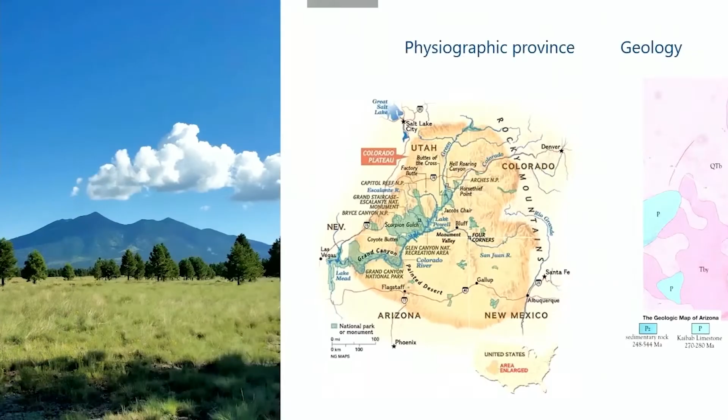And we're also at the edge of the San Francisco volcanic field. Within that volcanic field is the highest mountain in Arizona. You can see it on this picture. Mount Humphreys is a little over 12,000 feet elevation. Just to show you a map of that physiographic province, Colorado Plateau, that's on the left. And then on the right, we have a general geologic map for Flagstaff.

So the purplish colors tend to be relatively recent igneous rock, a mix of cinder, basalt, dacite, a little bit of andesite. Tends to be rather fractured, highly permeable rock. The more turquoise blue color is Kaibab Formation, which is mostly a limestone, also highly fractured and also has quite a bit of dissolution features, so it's a karst topography.

What does that mean for us as a stormwater division or within water services? What it means is that typically our streams and washes around Flagstaff are dry. They're ephemeral washes. And that's because of the high soil infiltration rate through the area due to the geology, the climate, and then also the vegetation. The ponderosa pine has a high degree of detritus and duff that soaks up rainfall.

So this graph we're showing here are two regional curves for bankfull cross-sectional area compared to watershed area. This is a typical way of looking at channel function using a traditional Rosgen method. So the red is an Arizona regional curve, the blue is a New Mexico regional curve. The dots that you see here are locations near or within the city in natural areas, and you can see they're lower than the two curves.

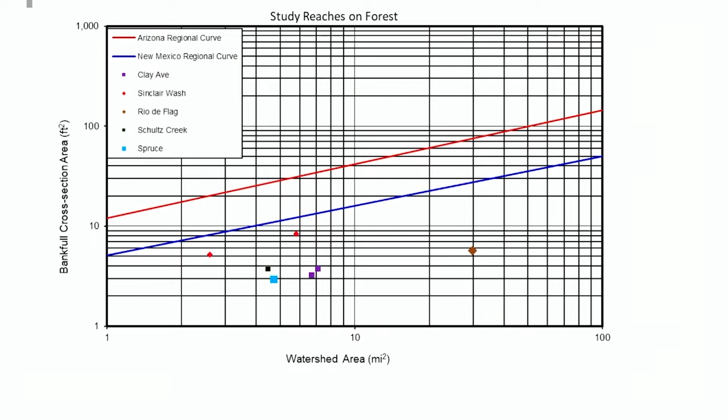So what that means is in natural parts of the Flagstaff area, the channels are undersized. And the reason they're undersized is because there's not much runoff due to that high infiltration rate. So I think I described this already. Our watersheds are historically complacent. That's to say that when it rains or snows, most of that does not come through as runoff. Most of it infiltrates or evaporates.

Now what this means is when we have disturbances in the watershed, which might be a wildfire or it could be urbanization, this drastically changes the watershed character as well as the stream behavior. So we start seeing that more flashy behavior that you'd expect with urbanization or a fire. Now this means that we have to manage for both complacent conditions coming off of natural areas that are undisturbed, and also for violent watershed conditions. And sometimes these are in the same areas. So you have one sub-watershed that has a very flashy nature, and right next to it another sub-watershed that might be completely complacent.

So when we manage this, we have a rather small team here at the City of Flagstaff. It tends to be 5 people. At the moment, we're down a few. You can kind of see the overview of the different things that we do. Within stormwater, the stormwater in Flagstaff actually is a utility, so we get a utility rate.

And with that, we oversee a capital improvement program, upsizing channels, culverts, detention basins, retention basins, low impact development, etc. We also have a fairly comprehensive system. You can kind of see some of our assets on the upper right-hand side there. And we oversee that for efficiency, maintenance, cleaning, also putting in master planning and flow modeling, so hydraulics and hydrology modeling.

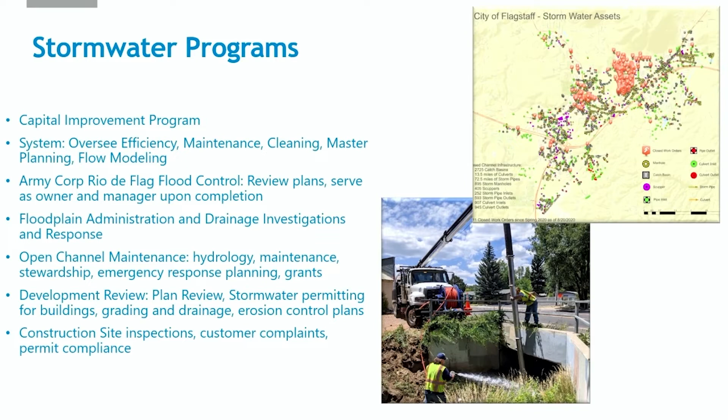So what we're talking about today is our open channel maintenance program. Historically, this has not been tracked by Stormwater until 2020. This has been tracked by our Public Works Department, a different division, and it's been transferred over to Stormwater directly in the last year. And this allows us to actually do a little QA/QC on our GIS layers and our asset management to make sure that we actually are tracking maintenance in a way that makes sense.

So we have 24 miles of channels that we report to FEMA as part of our community rating system. So that is the CRS Activity 540. And then we have another 112 miles of natural channels, minor ditches, swales that are not reported to FEMA and are just maintained within the city internally.

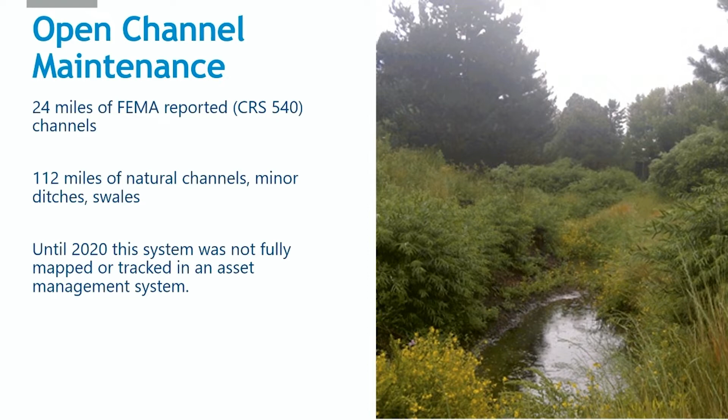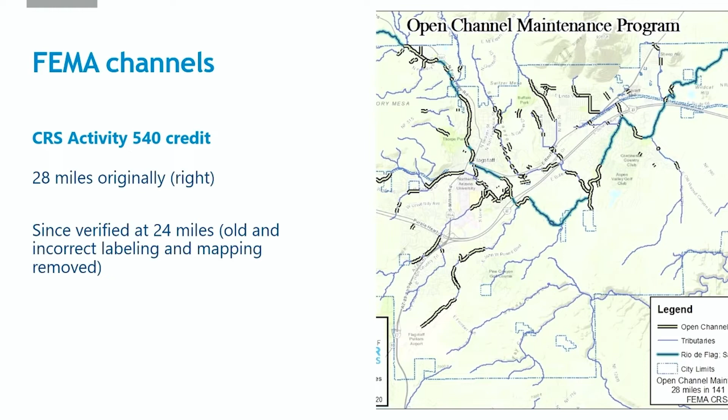So on the right-hand side, you can see a picture of those 24 miles. Before 2020, we counted it as 28 miles. Some of that was redundant or incorrectly labeled, so we reduced that through field verification. And then on the right-hand side here, you can see the other 112 miles of channels, roughly. This is being verified currently as we speak.

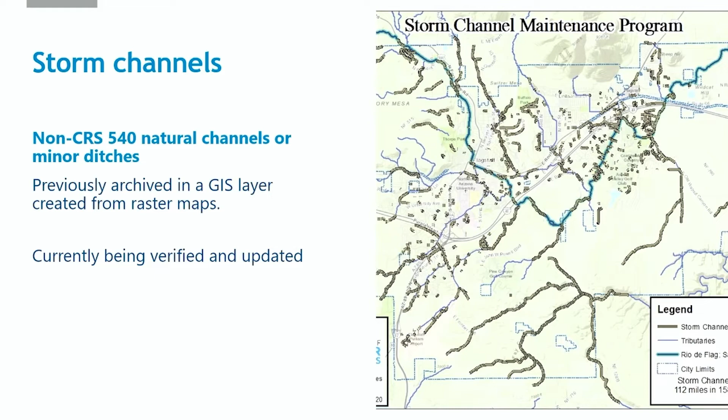All right, so here we have some examples of what we're talking about with this open channel maintenance. So up until 2020, when we took over the program, most of these maintenance activities were monitored in Microsoft Excel. So they're in a spreadsheet and they just kind of tracked it as they went. So these are the examples of how we've swapped over to our CMMS.

So for this example, you can see on the right, an example of a head cut restoration. So this is a head cut, which is where you have an active stream incision. So a disturbance, the stream starts incising, and that incision process starts moving upstream, so opposite of flow. So we're actually seeing this in process.

And here you can see where we widen this out and start laying back the banks to provide for a stable channel configuration. So this is the start of what we call a Zuni bowl, which is a type of head cut mitigation, if you will, provided by using these quasi-traditional methods in the Southwest. Works pretty well in ephemeral areas. So we're laying back the banks here.

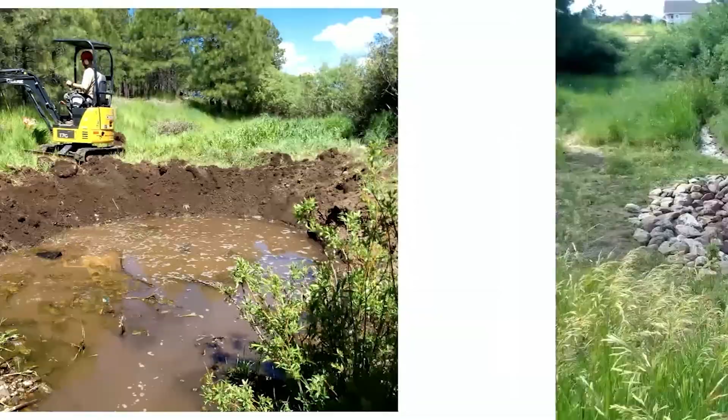Next example here is where we actually re-armor the banks, allowing for water to come in, kind of collect in 2 subbasins before leaving out through 2 check dams. Another example of a typical open channel maintenance procedure.

And moving on, I'm going to hand the presentation over to Corinne, and she is going to start talking about the meat and bones of what we're doing here with the CMMS system, our asset management here at the city.

Thanks, Ed. So my name is Corinne, and I am the Information Systems Administrator for City of Flagstaff Water Services. So I work with the SCADA and IS team. So I work with the GIS, CMMS asset management, as well as IIoT field devices. So our division or section is unique because we have our own GIS section, whereas we have a GIS for the entire city hall that includes anything but water services. So like our community development, parks and recreation, sustainability, etc.

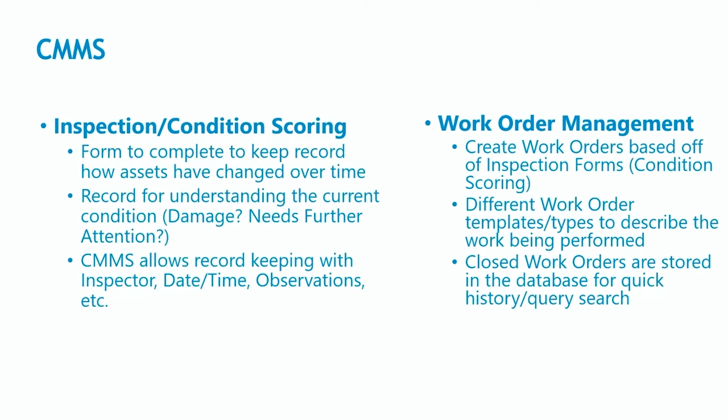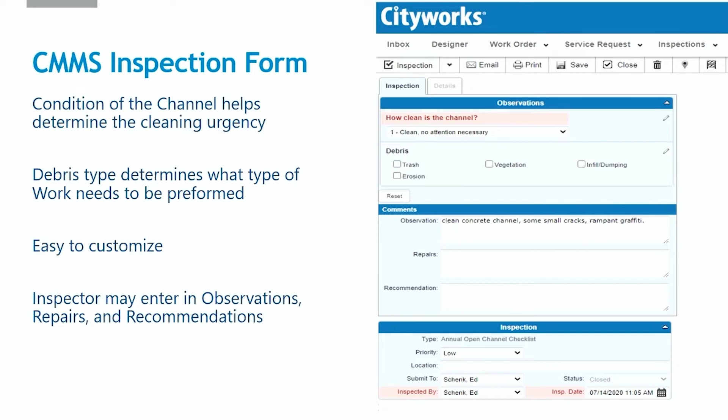Our field technicians use Microsoft Surfaces. They have the option to use that as a tablet or a laptop, and with CityWorks it's all web browser based. So they're just using Firefox, and then they need to have internet connectivity such as a MiFi or a Cradlepoint within the service truck.

And they have access to the digital atlas, so pretty much our entire GIS, in addition to all the open inspections and work orders. And for workflow, all they have to do is click on the appropriate icon, and then they can fill out the appropriate inspection form or work order form.

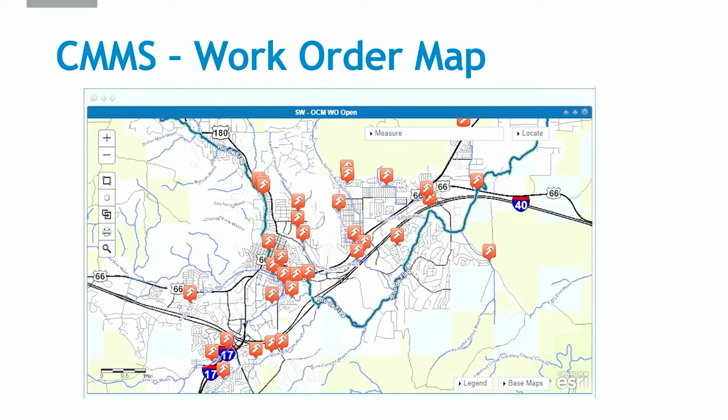This is an example of an open inbox map. So this is what the field technician can see. Here we have open work orders. So all they have to do is click on the red icon, and that'll generate the open work order inspection where they can then fill that out in the field.

So if you recall, we collect the inspections first to understand the condition of the asset, and then from there we create a work order on top of that inspection form.

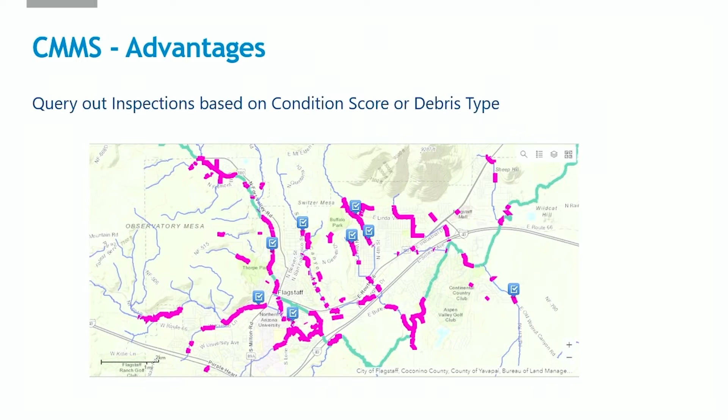So with CMMS, another advantage here is that you can query out inspections based on condition score or debris type. And so in this example on the map, you can see all of the inspections that have a condition score of 3, and those are represented by blue checkboxes. With CMMS, you can also select a specific stream reach, and you can look at that related work history in a tabular format where you can bring that down into an Excel spreadsheet.

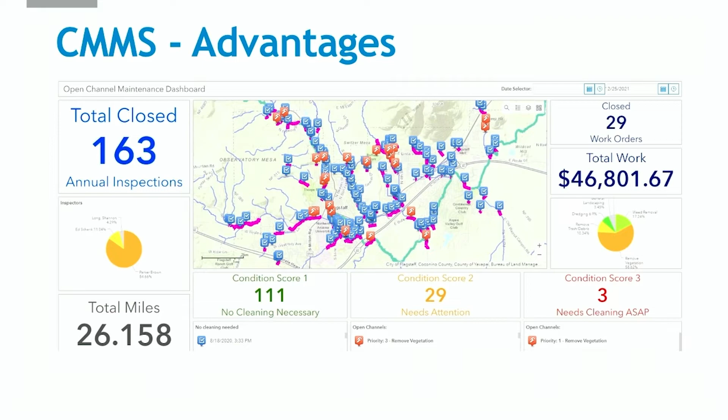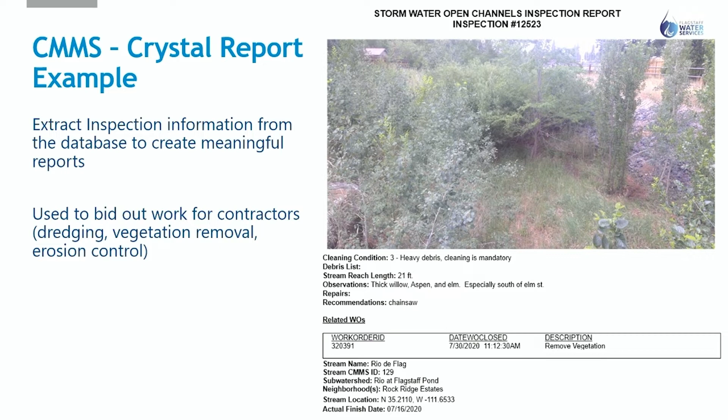And also, you can take that data in that CMMS database and use Crystal Reports to help generate these PDF static reports based on the inspection form. So pretty much, we're taking that inspection form and that GIS information, and we're creating this static PDF that we can keep in a shared drive or print out and put in a nice binder just for our record keeping.

So in conclusion, last year we implemented CityWorks for our Open Channel Maintenance program, and we were able to record our inspections and work orders through a digital software, and this allows us to record the history for that Open Channel maintenance. And with CMMS, we can document the type of work, the conditions, and cost, and then we can display that information on dashboards where we can easily distribute that to the individuals who want to see this information.

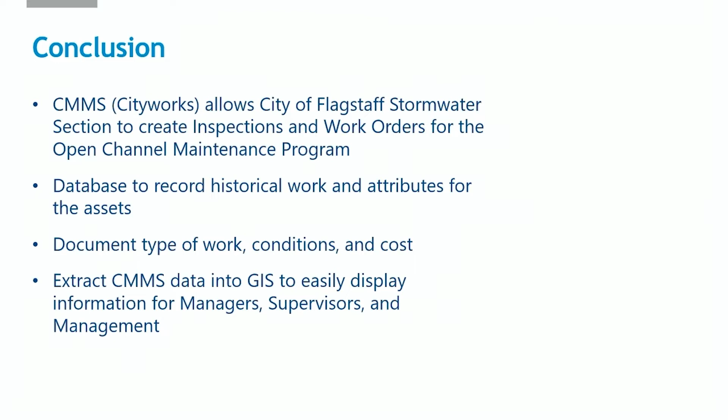So the first question for Ed and Corin is: are Flagstaff's stormwater and floodplain management programs integrated? Do they handle all FEMA, EPA, and Corps of Engineers coordination? Yeah, so I don't want to say we're unique, but we're different than most municipalities in Arizona where we are coordinated and integrated. So we are a stormwater utility. We receive a utility rate from the community.

So we do manage the FEMA floodplain within the city limits. So we have to work with the county on the city-county coordination where we have water either entering the county or entering the city. Stormwater water quality we work on ourselves, and then obviously the Army Corps, the 404, 401 type permitting we do as well. We also have our own capital improvement program, CIP program. So we have about $2 to $3 million a year for improvements.

Nice. This one's probably more for Corinne: how were the open channels segmented to track work against them? For example, were they segmented by specific lengths, between access points, road crossings, etc.?

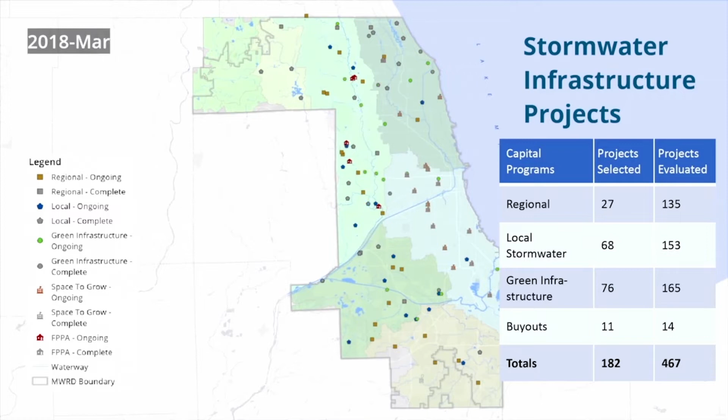As our stormwater programs have expanded, combining all the prioritization factors in an ever-growing data set has become a challenge. Fortunately, we have some very smart engineers like Eddie Paulino who are helping us to make more informed decisions on the projects we add to our capital improvement program. Eddie? Thank you, Joe.

Before I get into the example, I would like to show you what the process of decision modeling involves. What we're trying to do is create a mathematical representation of reality. We start by finding a problem we're trying to solve, then formulating it by gathering the relevant and available parameters, making assumptions, placing in constraints, and adding the mathematical relationships. From there, we perform our analysis.

In the case of project selection, we will be optimizing the linear program to maximize the total benefit our organization produces with the project selected. We then interpret our results, perform sensitivity analysis to see the impact of changing constants, and finally, we can incorporate risk by adding uncertainty into our problem parameters. We then interpret the results and see how well it matches reality. If it does not make any sense, we start over again in this iterative process.

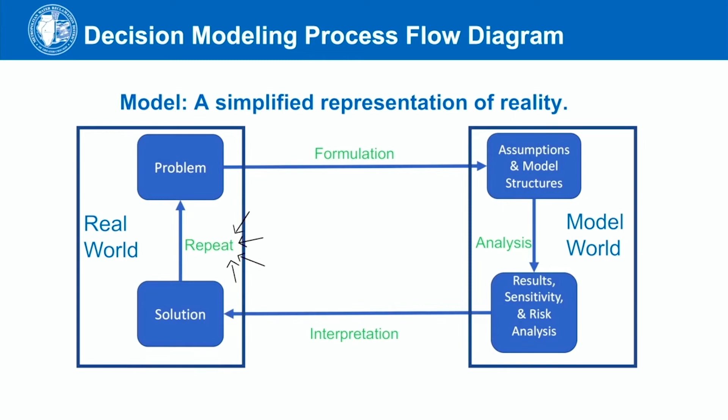Okay, so now let's get into our example. When working with these spreadsheet models, it's useful to use a color key to identify important cells in your formulation. In blue, we have our decision variables, or what we're changing. For example, we're changing, in this case, the funding contribution our organization is providing across 4 stormwater management projects.

In yellow, we have cells that are used in the formulation, which can include constants and multipliers like a discount rate, used to calculate life cycle costs, or multipliers used to assign a point structure to parameters like the number of benefiting structures or the median household income of the project community.

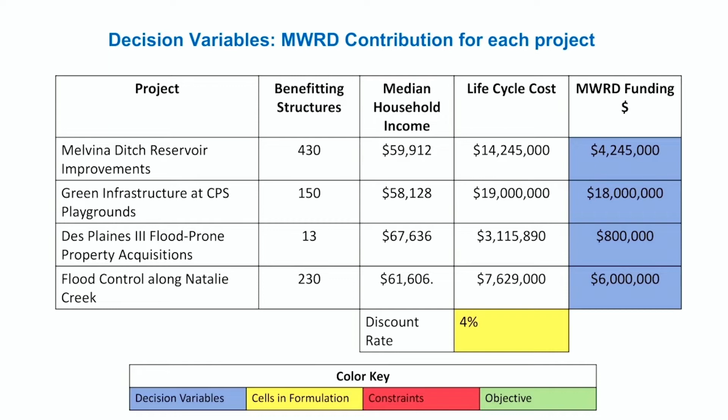In green, we have our objective function. In this example, we're using 2 selection criteria. Life cycle cost divided by the number of benefiting structures or structures being removed from the floodplain, which is scored from 0 to 10. The median household income of the project's community, which is scored from 0 to 5.

We add up the score for the 2 criteria and multiply the total to get a project score. We then sum the scores across all our projects. This formulation makes it so that the benefit of the capital program increases the more we fund higher score projects.

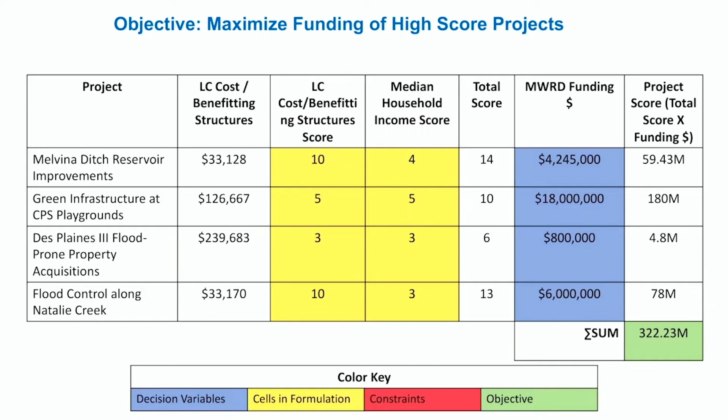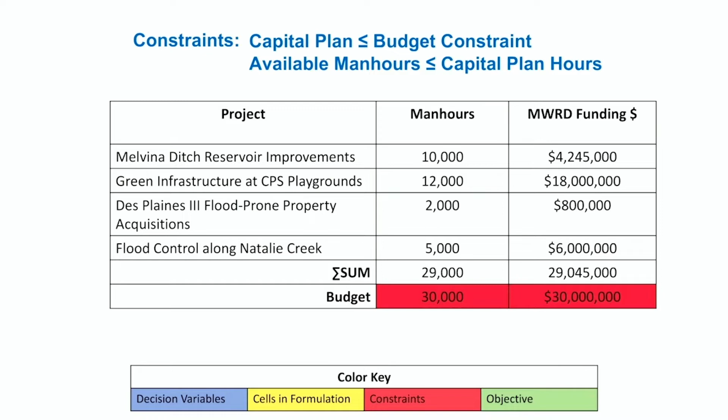In red, we have our constraints where we are making sure that we do not exceed the number of available staff man-hours to manage the projects, as well as the budget allocated to our stormwater partnership programs. The next step in this process is to enter our formulation into our tool, Microsoft Excel Solver. Solver is a standard Excel add-in that was developed by Frontline Systems. It comes with your Excel installation free.

It can be turned on by going to the add-in settings, then clicking on the checkbox to enable the feature, which you see on the screen here. The tool then shows up on your data ribbon in Excel, titled Solver. This tool allows us to maximize, minimize, or force our objective to reach a specified value. We can use inequalities to enter in our constraint relationships.

We also use the most common constraint, which is the decision variables can't be negative, which prevents us from borrowing from a low score project to fund a higher score project. The optimization method we are using is called the simplex method for our linear program.

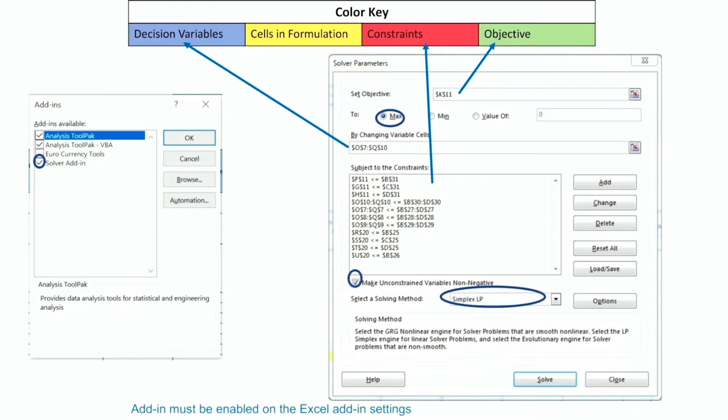The simplex method to solve a linear program can only be used when your objective and constraints are linear functions of the decision variables. It works by checking the impact on the objective when making small changes in each variable. It then exhausts each variable in order of impact until all constraints are met.

Linear models guarantee that the solution is a globally optimal solution, or in other words, the best possible solution in our problem. Solver also provides reports for linear models that do some of the sensitivity analysis you would have otherwise had to do yourself.

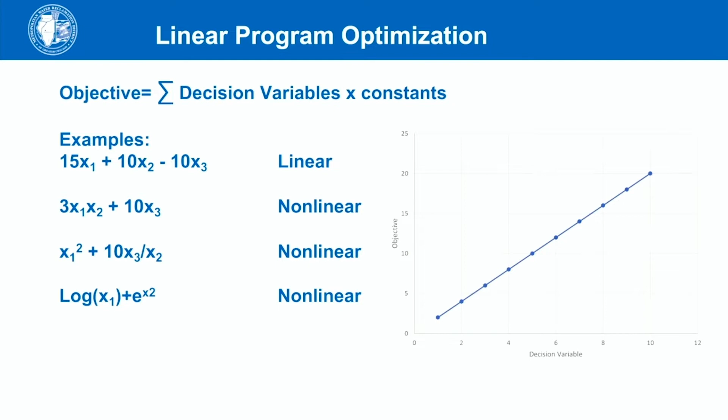The most insightful report is the sensitivity report, which gives you what it calls a shadow price, or the amount your objective changes as you shift one unit of a constraint one way or another for an allowable range. A sensitivity report can tell you, for example, that by increasing your budget or your staffing levels, you are able to fund an additional amount towards a project or an additional project in your program.

Another tool for sensitivity analysis, and this one developed by professors at Indiana University, is data table. You're able to run the optimization by changing one or two parameters at a time. Here, I am changing the weight of the median household income score and the weight of the life cycle cost divided by the benefiting structure score. That's my two criteria that I'm considering for this project selection example. This tool essentially allows you to test the impact of your assumptions by changing the assumptions and seeing how the results change.

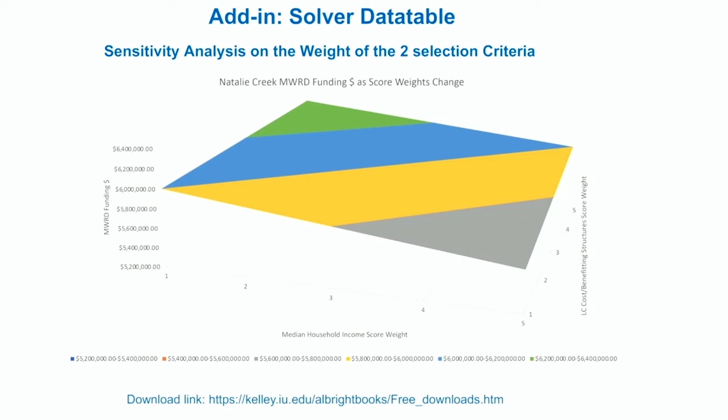Now, if you are unable to formulate your problem through a linear program, Solver also has two nonlinear solving methods: the generalized reduced gradient GRG nonlinear and the evolutionary method. The downsides of using these methods is that your solutions are local, or basically not guaranteed to be globally optimal, and it can take much longer for the computer to run the solving algorithms.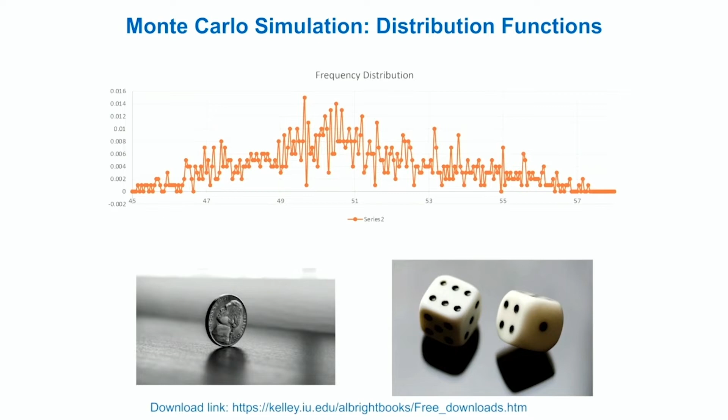The analysis essentially works by rolling a weighted dice one time for each simulation for each probabilistic parameter. We then would run thousands of simulations and see how the results change. What you would expect to learn from performing the Monte Carlo analysis on an example like this is that a lower score project may be a better option to fund on a given year if it has a higher likelihood of moving forward than a higher score project. The results of a Monte Carlo simulation analysis can provide to you confidence intervals that tell you, for example, that there is a 90% chance that you'll be able to utilize X number of dollars on a given budget year with the projects you are considering in the stormwater management partnership programs.

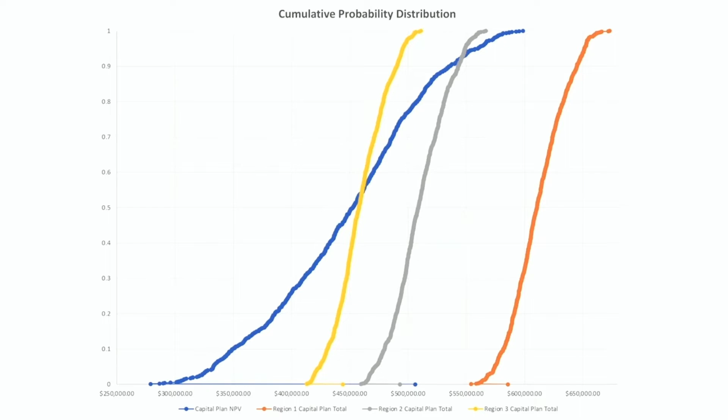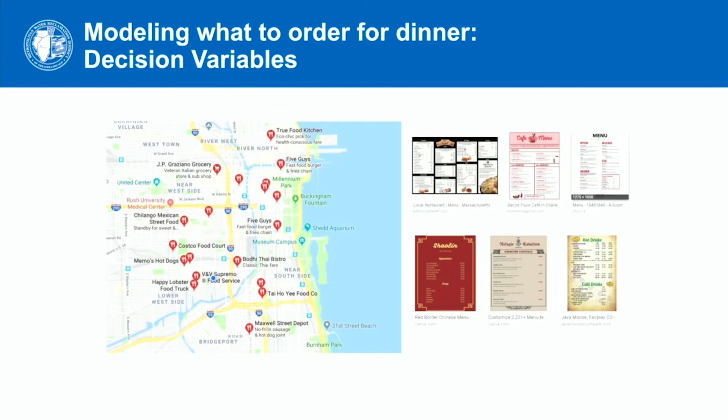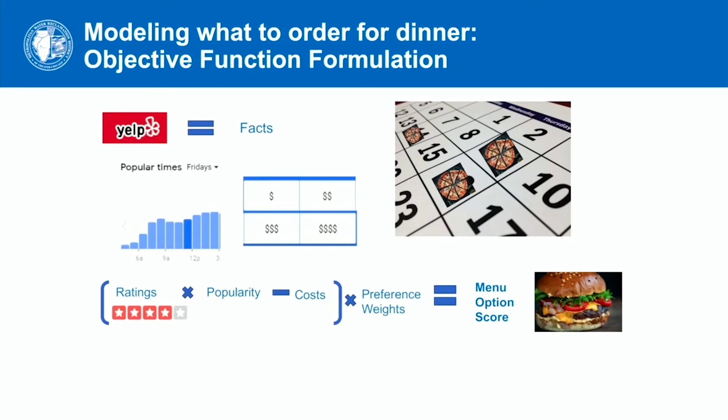All right, so we know practice makes perfect, so let's go through one short example. The problem here is what to order for dinner. The decision variables are restaurants near my house, and my constraints are going to be my budget and the distance that restaurants are able to deliver. For my objective, I'll be maximizing the score that will be given to each menu option by considering the cost, my personal preference based on what I've been eating throughout the week, the popularity of the restaurant, and customer review ratings on Yelp and Google. I'll then run my solver and check my results.

Oops, it looks like I forgot to incorporate some of the health parameters into this decision model. This example illustrates the commonly used phrase you guys have probably heard with everything going on with COVID and COVID modeling, which is that all models are wrong, but some are useful. And you make these models useful by going through this iterative learning process. In this case, I could have added some constraints limiting my daily intake of certain nutritional components based on FDA recommendations.

Okay, so we have discussed how decision modeling tools can be used for project selection, but there are many other decisions that these tools can be used for, including workforce scheduling to determine whether overtime or hiring new staff is optimal. You can use it for budget and revenue management to maintain a consistent cash flow with the initiatives undertaken. You can also use it in materials procurement to optimize if buying and storing materials now is more cost effective than buying materials when they are needed. And you can even use them for personal decisions like home purchases or even equity investments.

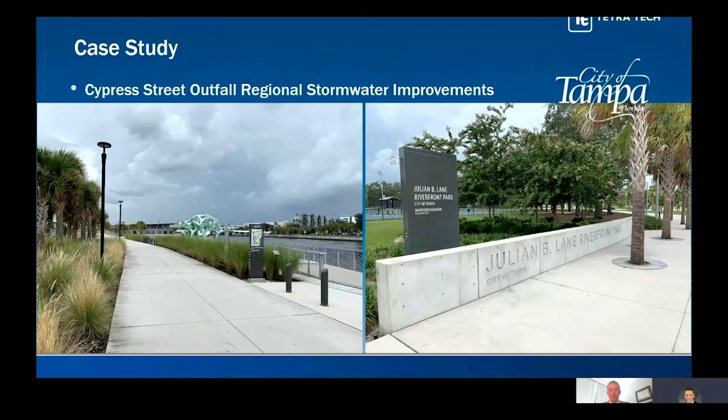Today, I'll be presenting a successful flood mitigation case study by highlighting the City of Tampa's Cypress Street Outfall Regional Stormwater Improvements Project and how we are nearing the successful implementation of providing large-scale flooding relief to this urban environment. Here, you'll see a brief clip depicting the project's location. Our project is located within the West Riverfront, North Hyde Park, and West Tampa neighborhoods, and is adjacent to Tampa Prep School, Julian B. Lane Park, and the University of Tampa.

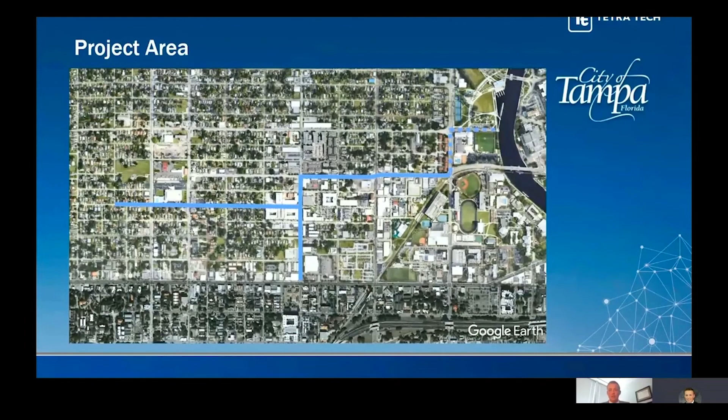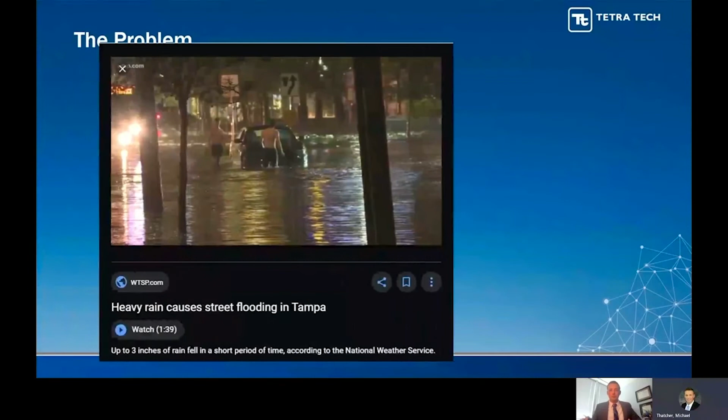So first, I'd like to start off with the problem. As depicted in these photos and articles on your screen, the city is no stranger to intense storm events. Intense rainfall in a highly developed urban environment can be a predominant cause of major roadway and property flooding, where a lack of adequate stormwater infrastructure can only exacerbate the issue. Heavy rainfall causes high-velocity overland flow, which can result in stormwater facilities exceeding their capacity. The city has been plagued with large-scale flooding due to heightened rainfall intensity, sea level rise, and a lack of critical infrastructure.

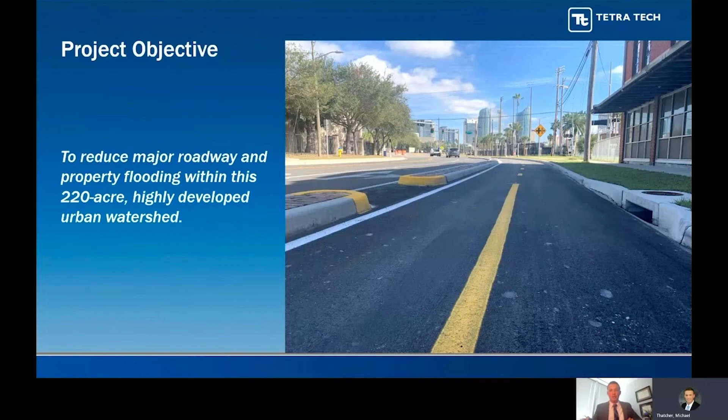Our project objective is simple: to reduce major roadway and property flooding within this 220-acre, highly developed urban watershed. So the first step for this project was setting our project's limits. The limits were determined based on previous studies and conceptual modeling efforts, records of historic flooding, including repetitive loss properties.

On your screen, you'll see the red outline depicting these limits, which are bound to the west by West Gray Street from Tampania Avenue east to North Rome Avenue, north from North Rome Avenue at Kennedy Boulevard to Cass Street, and from West Cass Street east to where we tie into existing infrastructure at the intersection of North Boulevard. In total, these limits encompass approximately 1.5 miles.

The existing infrastructure we tie into are twin 9-foot by 7-foot box culverts, which travel along North Boulevard and discharge near Julian B. Lane Park. Once we had set our project limits, a team of skilled land surveyors obtained all necessary topographic and subsurface information for use in the modeling and design of this project.

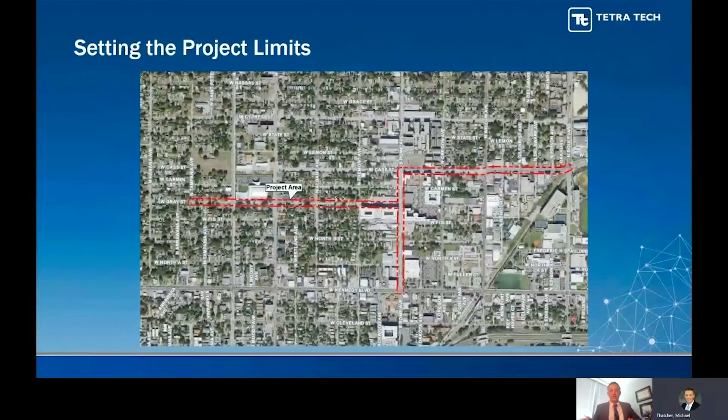For this project, we utilized XPSWMM for the stormwater H&H modeling, a product developed by Innovyze. We utilized a 2D model, which means rather than just looking at the routing of links and nodes within the project area, think links and nodes as pipes and structures, we also look at the surface aspect and how water travels relative to the ground topography. Below is an example of a link and node schematic.

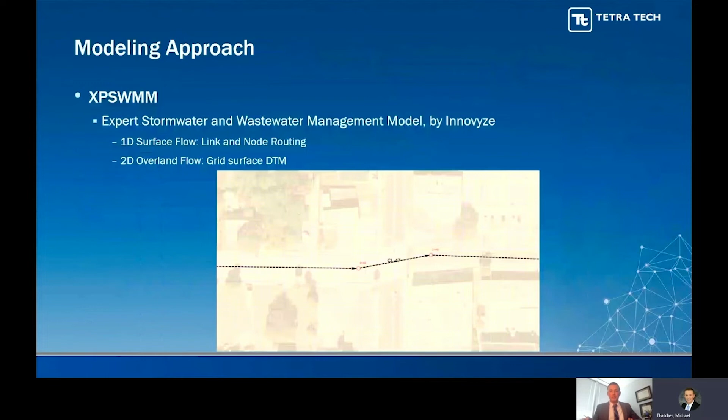Once our project limits have been set, we can then perform a basin analysis to determine the limits of the contributing watershed. The existing watershed, including subbasins, are depicted on your screen. The design storms we evaluated for this project were based on a few things. First, we needed to meet permitting requirements with the Southwest Florida Water Management District, who is the jurisdictional review agency for stormwater environmental resource permitting for this project. This required we design the system to the 5-year 24-hour storm event.

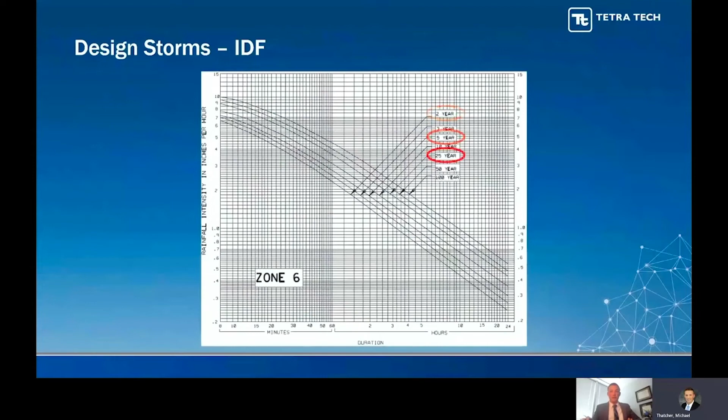We also evaluated the 25-year 24-hour storm to review the implications of heavier rainfall and its effects on the proposed box culvert system. Lastly, we evaluated the mean annual storm to provide a baseline for a more average storm event. Intensity, duration, frequency graphs were utilized from the Florida Department of Transportation's Drainage Manual, including hydrographs and rainfall intensity curves. Also shown here is FDOT's depth, duration, frequency curve to determine the total depth of rainfall for the desired storm event.

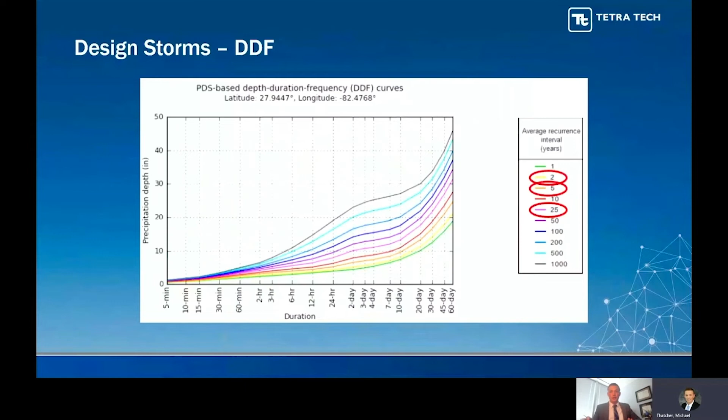Once we input our existing infrastructure and assign necessary conditions to the model, we then reviewed the existing conditions results to verify the results closely matched that of known conditions, again going back to the records of historic flooding. On your screen, you will see the outputs for the 3 design storms modeled for this project. As you can see, there's a large concentration of water staging along the central portions of Gray Street to the west and North Rome Avenue to the south. As I flip through, you can also see that the estimated staging levels are increased as the storm intensity increases.

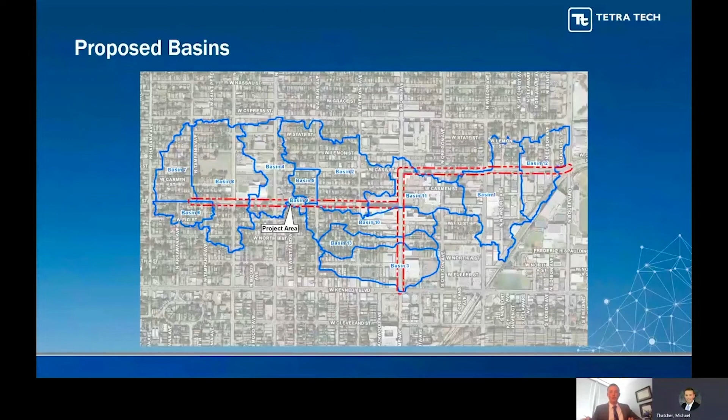Once we are comfortable with the existing conditions modeling results, we then develop the proposed basins. Here, you'll notice that the number of basins increased by about 3-fold, based upon the proposed increase in stormwater infrastructure. Since we're proposing additional inlets in the proposed conditions, there are now more places for stormwater to enter the box culvert, therefore cutting down on the size of the proposed basins.

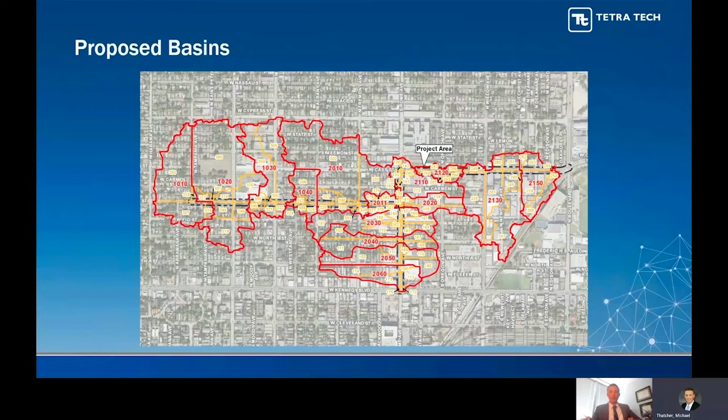We then began inputting proposed links and nodes into the model. We began with sizes which were evaluated by other consultants in previous studies. Once these were input into the system, we evaluated the size of proposed box culverts in an effort to optimize the system and provide potential cost savings. An example is shown below, where different runs of box culvert sizes were compared for the 5-year, 24-hour storm event.

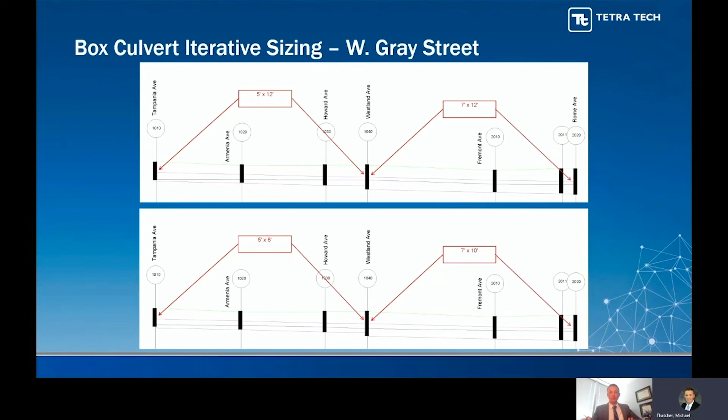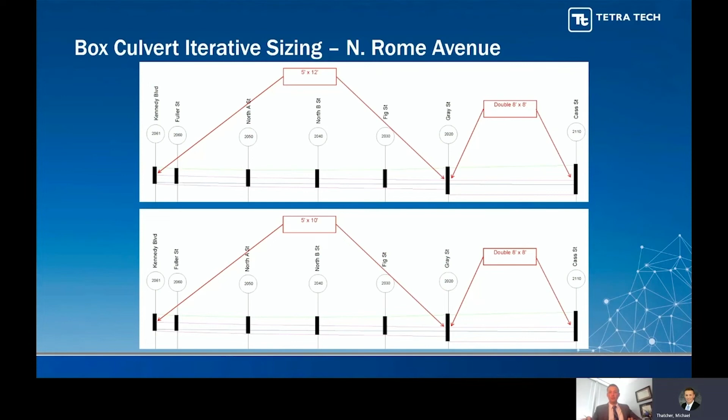Another example is shown here on Rome Avenue, where we evaluated and compared between a 5-foot by 10-foot box and a 5-foot by 12-foot box culvert shown for the 5-year, 24-hour storm event. In total, Tetra Tech performed 7 different sizing iterations along the proposed trunk line to optimize the box culvert system.

Here's a snapshot along the downstream roadway, West Cass Street, where we proposed twin 8-foot by 8-foot box culverts. Although the Southwest Florida Water Management District only required this be designed to the 5-year, 24-hour storm event, Tetra Tech and the city were cognizant of the effect that too small a culvert could have on the project's cost-benefit ratio when evaluating larger storm events, such as the 25-year, 24-hour storm.

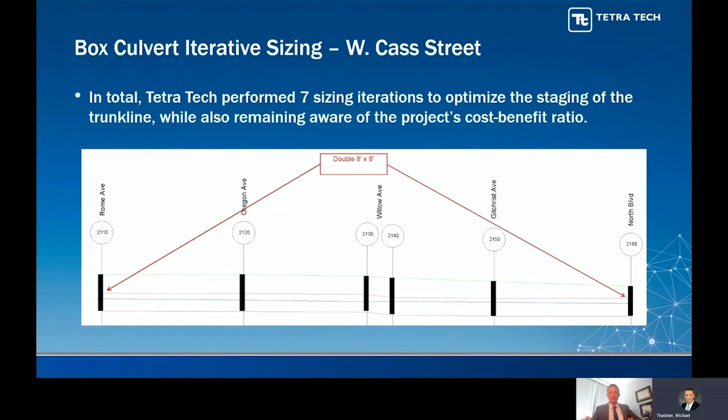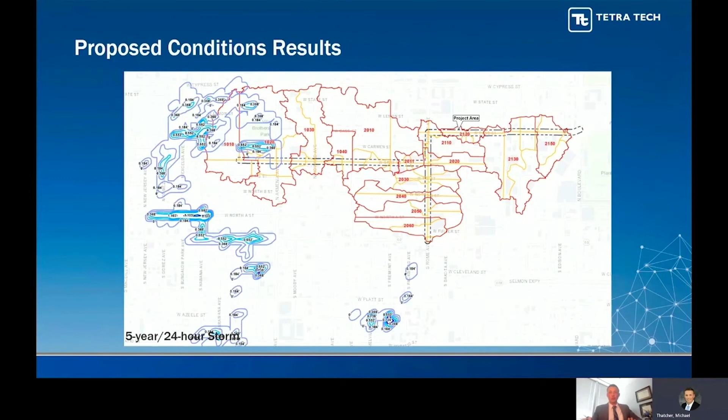Shown below is an output of the proposed conditions modeling results. As you'll see, the flooding depicted in the existing conditions results is greatly reduced along West Gray Street and North Rome Avenue for all 3 storm events.

So now we'll move into our design approach, including some constraints that were evaluated. Some of these constraints include a flat grade along the project corridor, various super elevations within the road which were not conducive to drain water, a lack of existing inlets, as well as a confined right-of-way. The picture to the right gives a glimpse at the flat existing grades, many of these set near 0%.

We designed these roads to have positive drainage to all inlets at proposed low points, as well as secondary inlets along the roadway to reduce the spread of water into the road. We did all of this while being cognizant of the narrow footprint to ensure we could tie in all grades within the right-of-way.

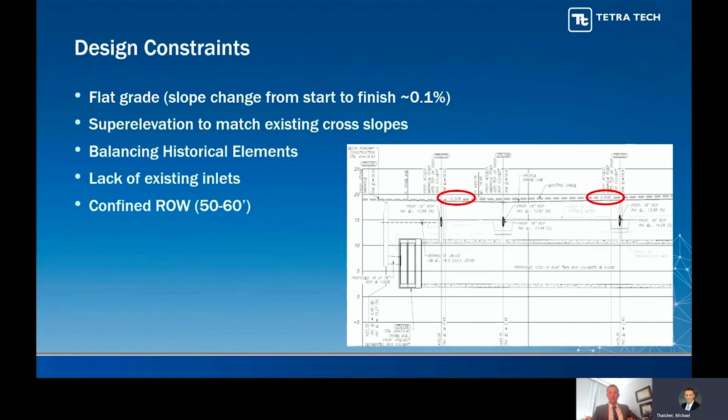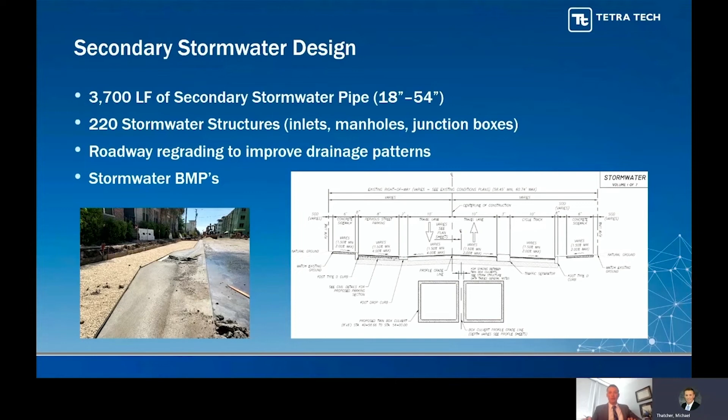In addition to the design of the regional box culverts, we also designed all of the secondary stormwater infrastructure to connect to the proposed culverts. This included over 3,700 linear feet of stormwater pipe as large as 54-inch, and over 220 stormwater structures, including inlets, access manholes, and junction boxes. Lastly, we designed a full roadway reconstruction to improve drainage patterns along the roads and implemented stormwater best management practices to aid in water quality.

So besides stormwater, what else did we do? This roll deck will give you a visual of the additional services we provided on this project in the order they were constructed. They were constructed in this particular order to reduce the number of utility service outages. Now, obviously, considering the design constraints, this was quite the undertaking to fit within a 50 to 60 foot right-of-way.

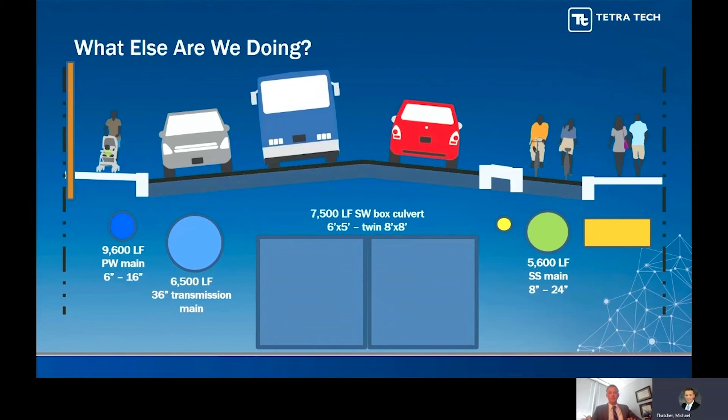And below is a detailed list of these additional services, which included over 5,600 linear feet of sanitary sewer improvements as large as 24-inch, 9,600 linear feet of potable water distribution improvements, 6,500 linear feet of new 36-inch potable water transmission main, and included multiple major utility relocations, as well as a suite of multimodal improvements, including new sidewalks, bike lanes, and a two-way cycle track to connect to the Green Spine cycle track, which is being implemented in other locations throughout the city.

And as you can see, the confined right-of-way is an understatement. Being as narrow as 50 foot, many of the existing buildings along the corridor front directly adjacent to the right-of-way.

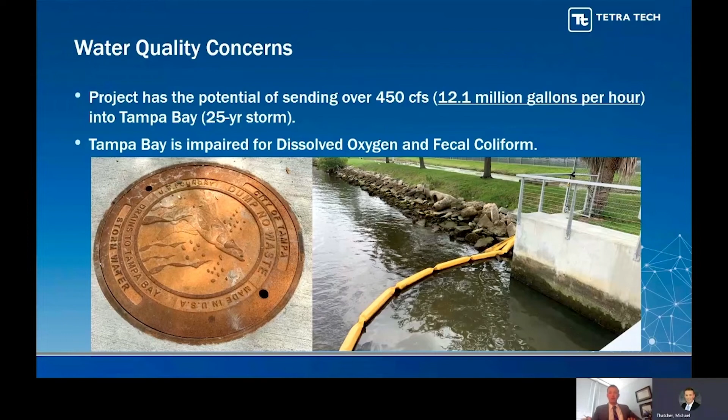Based on the size of the contributing basin, over 220 acres, this project has the potential to send upwards of 450 cubic feet per second of water into Tampa Bay and the Hillsborough River. Tampa Bay is impaired for dissolved oxygen and fecal coliform. So what did we do about it?

Some of our solutions included the implementation of second-generation nutrient separating baffle boxes, which help to remove suspended solids, as well as the utilization of Bold and Gold media cartridges in these baffle boxes, which aid in reducing nutrients like nitrogen and phosphorus. Also included was the addition of pervious pavement to aid in groundwater recharge, inlet skimmers to catch floatable materials, and grass swales to aid in water retention.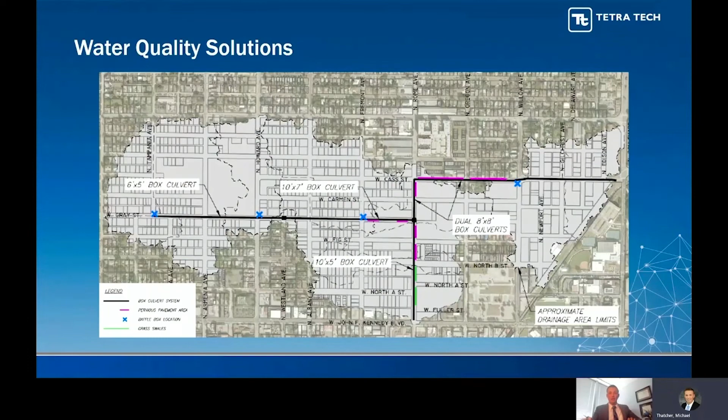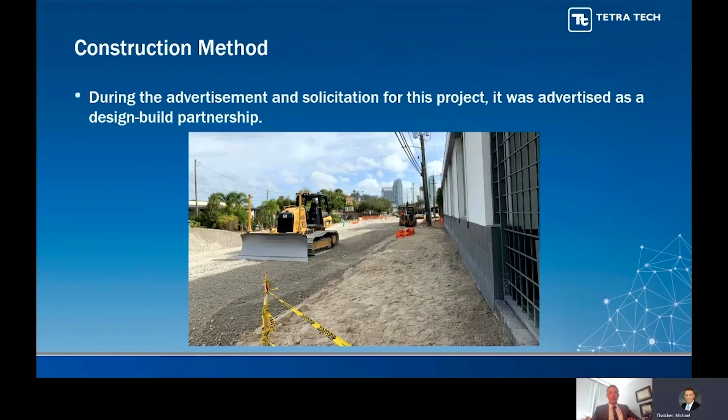This project was advertised as the design build construction method. So why design build? Design build projects aid in providing an expedited process, meaning their speed of delivery to the client. It also provides a collaborative team-driven process where the contractor and engineer work hand in hand from the beginning of design. It can also eliminate some oppositional conflicts which can be found in standard design bid build projects, and can result in cost savings by identifying constructability issues early in the design process.

Our project schedule was streamlined in an effort to condense the time between notice to proceed and construction completion. Shown below is a summary of the project tasks and milestones. As you'll see, we went from design notice to proceed to construction notice to proceed in less than 1 year, which for a project of this magnitude is an impressive undertaking. But why so fast?

The City of Tampa had secured project funding from the Southwest Florida Water Management District and had a district approval date which could not be extended. The design build team was able to meet that date and obtain unanimous approval to commence with construction.

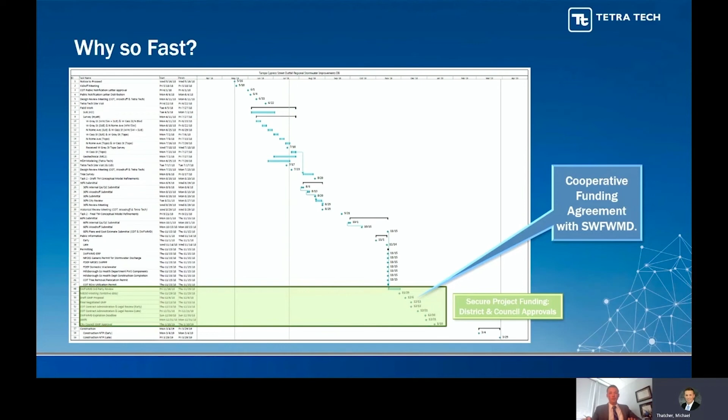So how much was funded? In total, the Water Management District provided 50% matching funds. When combined with the city, approximated to $35 million. This was completed in the form of a cost share agreement. Tetra Tech partnered with Woodruff & Sons, a general contractor, to implement both the design and construction of this project.

So how's construction going? Construction began in August of 2019 and is expected to be complete in November of this year, both on time and on budget, which is especially important for a project with a cost-sharing agreement. So now I'll flip through some progress photos of construction so you can get a better idea of the magnitude of these improvements.

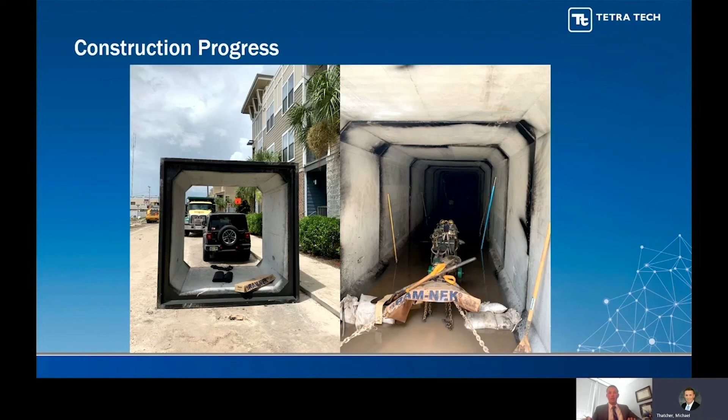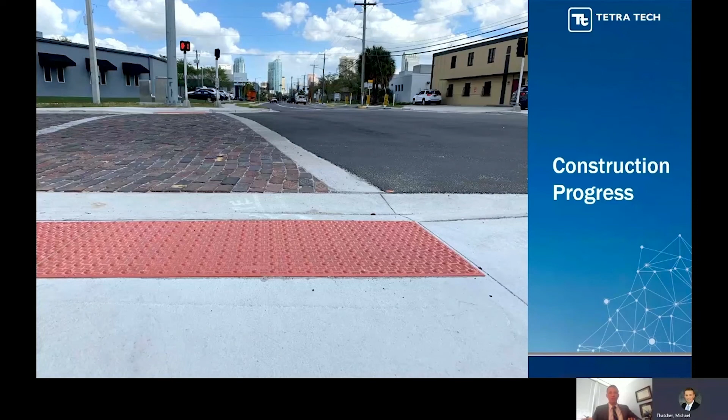Here's a Jeep for scale next to one of the 8-foot by 8-foot box culverts. Remember, we had 2 of these in the ground right next to each other. One thing I had previously shown on our slides was the historic significance of the project area. We were able to successfully blend a new design with the historic elements of the neighborhood. These photos give you an idea of the project's magnitude.

For a better idea of scale, this is at the intersection of Rome and Gray, where we have an excavation for a future junction box where a 5-foot by 10-foot box and a 7-foot by 10-foot box will tie into two 8-foot by 8-foot boxes. This hole is close to 40 feet by 40 feet and over 20 feet deep in the middle of an urban intersection, which is pretty impressive.

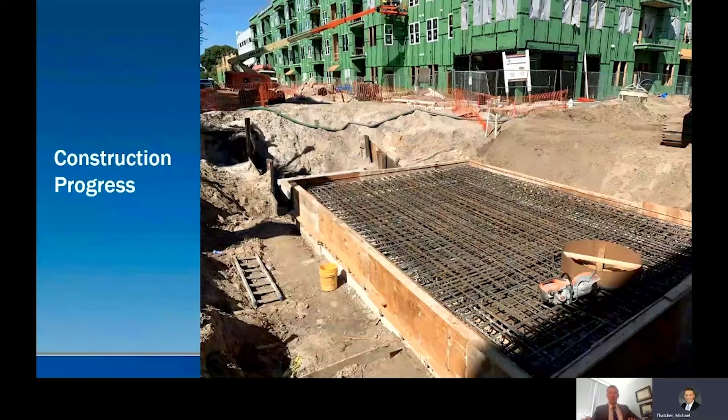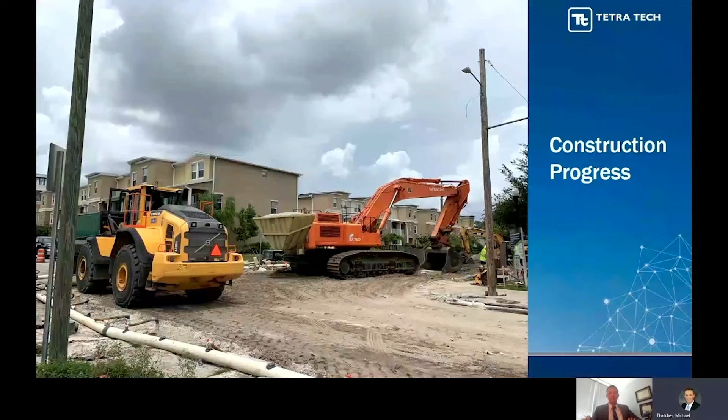Here's a photo of that same hole a few weeks later, about to pour the top slab for the junction box. Notice the residential construction in the background. As you can see, large infrastructure means large machinery. A majority of construction for this project occurred during the COVID-19 pandemic, which, as you can see, was a safety priority for the project team.

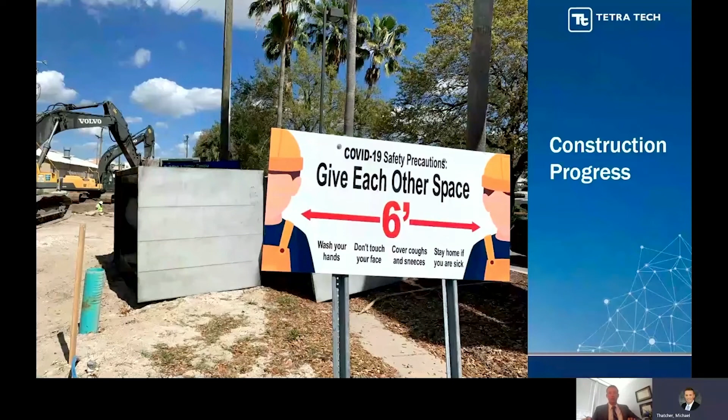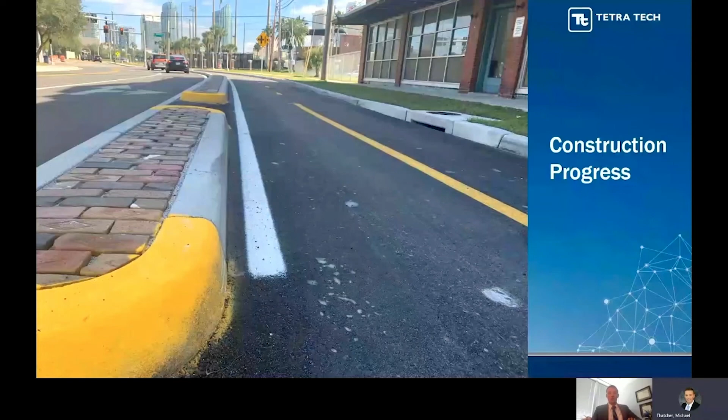Here's a few photos of the two-way cycle track. You can notice the median opening to the left for stormwater to enter the inlet. As you can see, existing brick was repurposed within the cycle track traffic separator in an effort to maintain historical elements.